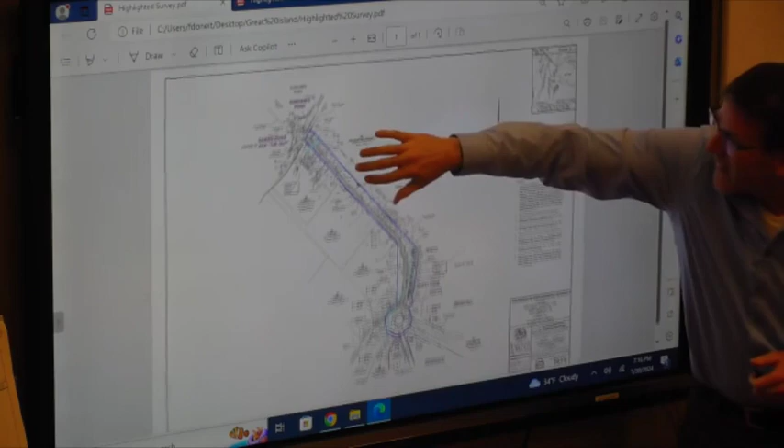The base flood elevation... Craig, can you just expand it just a little bit? Sure. Just open it up. Yeah, sure. Let me see if this is working. Otherwise, I'll go back to the mouse. Let me go back to the mouse. That was awful.

Let's see. Is there a little hand here somewhere? No little hand. If you click on the zoom in, yeah, just do that a little bit. Perfect, there. Yeah. So that's the flood zone by the gates. Okay.

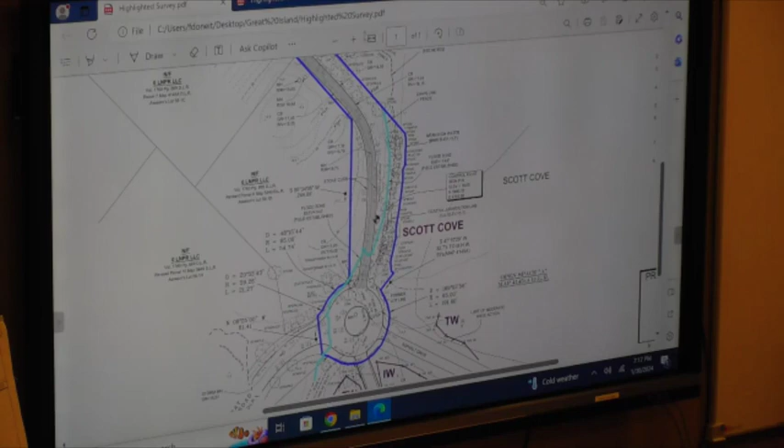This would be a flood elevation of 14. The grade here at the edge of the road is about a 10. Mean high water is an elevation which is indicated on the other side. We get down to the other side. So there's the same condition on the other side. Mean high water elevation is 3.7, so that's your kind of average high tide elevation. That represents the boundary of the parcel there. So this is the part below the base flood elevation over here. Thank you. Yep, going back big.

We have the coastal resources, a part of your coastal site plan, and we've submitted for the record a CAM assessment. So what are the coastal resources in the area? North side, we've got Gorham's Pond, estuarine embayment. It obviously is dammed off by the dam below Rings End Bridge, but it has tidal influence, so it's actually regulated. It's the one water body on here regulated both by EPC and P&Z. We have Darien River, AKA the Gut. That is a tidal water body, and there's tidal mudflats there and coastal resources there.

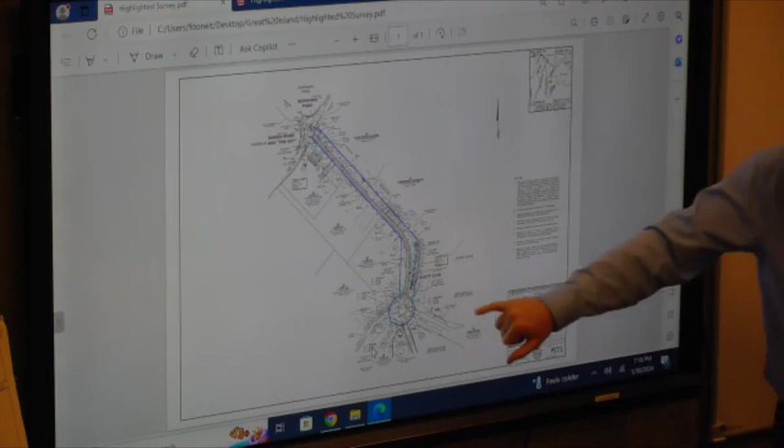We have Scott Cove, which borders the site here. This property boundary of this 1.6 acre property is coincident with that mean high water line elevation of 3.7. Again, a lot of tidal mudflat in here. It's a coastal resource. And then there were some flagged tidal wetlands. So at the bottom here, there's the two forking causeways that go into Great Island. There's the earth one that's lined by the sugar maples, and there's the stone one that's lined by the walls. So on the outsides of those causeways, there are tidal wetlands. On the inside of those causeways is an inland wetland because it no longer has any tidal influence.

So I'm going to go back to the tax map because you can see those two. Those are homeowner association parcels, I think. Yeah, and then there's two large open spaces associated with the original subdivision here and here, and those are the Great Island Association. Those are not owned by the town. And they both touch the cul-de-sac. That is correct.

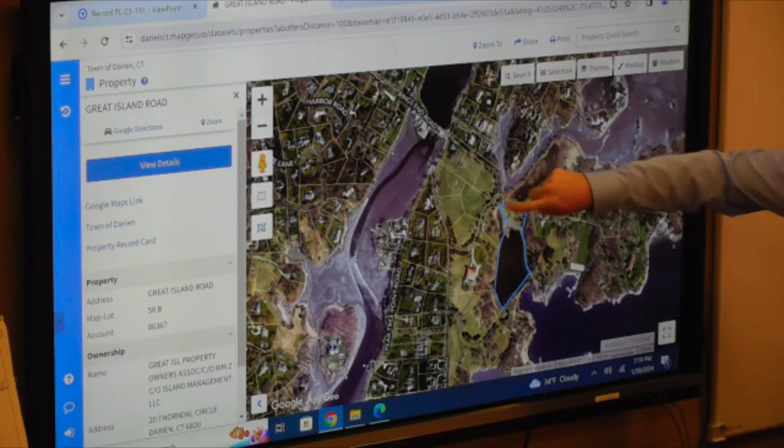So can you point the wetlands out there again? Well, yeah, you can pretty much see. This is all tidal marsh on this open space here. There's an inland wetland between the two driveways here, and you can see, this is a tidal pond here, and you can kind of see how the water from that tidal pond comes up in a finger right there on this actually residential property right there.

And then across the river to the north, what's the name of that street, I forget, where that house is? Oh, this is Beverly right here. Exactly, okay. Yep. So that's the tidal wetlands between our property and... Yeah, it's Scott Cove, where Scott Cove ends and begins is that, but that's what we call that. And that's all coastal resource tidally influenced. Thank you. So to talk about now the proposal, so we have the background set.

And I've got, this is the first page of the site civil engineering set. We've got a road profile at the top. We've got the plan view of the road at the bottom. Those two drawings are at different scales, so don't try to compare between the two of them. The bottom is a smaller scale and the top is a larger scale. But ultimately, there's a couple things that we have to do with this driveway. Let me call that up on here.

So there are actually portions of the existing driveway that extend onto the neighboring properties here and here. So that's property the town does not own. And so a part of this is getting the existing driveway off of the neighboring property. And then, in addition to that, we want to provide room for a 5-foot wide sidewalk and a grass strip between the sidewalk and the curb. So that west edge of the road is probably moving,

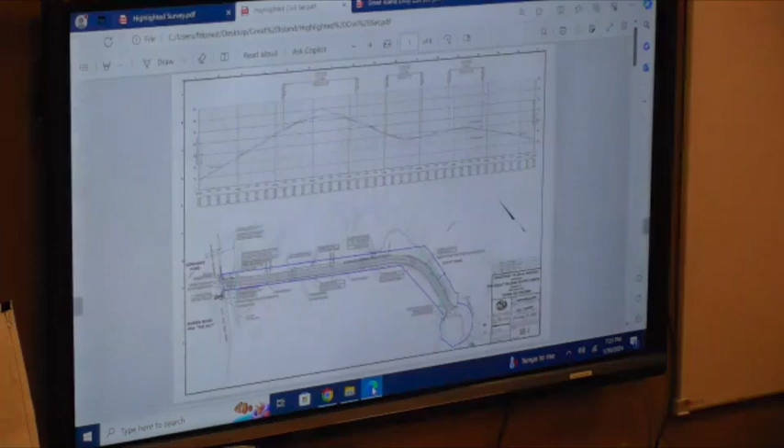So a few things have to happen to make this driveway and this sidewalk. One, we're kind of pushing things to the east a little bit. And in order not to disturb more property to that east side, we are proposing a few retaining walls, 3 to be exact, to make up the grade differences between where the new road is going to be and the existing grade along that eastern property boundary.

So the first wall that you see here is holding up earth on this side. So the high side is the neighbor side, the low side is the driveway side. You will see the face of that wall. And then these two walls are the opposite. The high side is the street side, the low side is the eastern boundary. So the wall face is viewable from the east. All you will see from the road side is potentially a parapet.

We have two ideas for protecting traffic and any vehicles that might decide to depart from the roadway surface. We're either going to go with a 2-foot parapet on these stone walls or install a wooden guide rail at those locations, again, for traffic protection. It's necessary given the grades and the heights involved.

In addition, of course, and Matt will talk to this in more detail, but this is too narrow to get to a 22-foot driveway here. So these gates have to be reconfigured. This pillar is on town property, but the town property boundary is basically just off the edge of that pillar. So these pillars and these gates here are not owned by the town, they are owned by the neighbor. So consequently, we're leaving them all alone and not touching them.

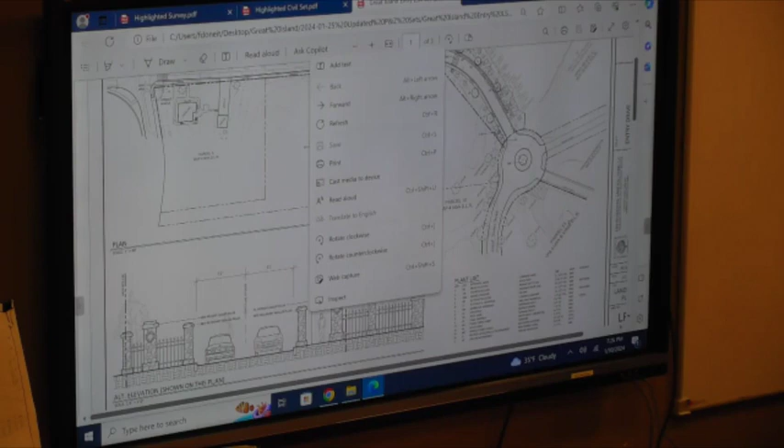So we're relocating this minor pillar to fit between the sidewalk and the curb here. And relocating this minor pillar to be symmetrical with that one. And then the major pillar, which is somewhere around here, is being relocated over to that side, again, to be symmetrical with this one. So this will be the new look when everything gets reconfigured.

So that was the gates, that was the road, that was the walls, that was the sidewalk. I guess I could talk a little bit about... Do you have elevations of the three walls? No, we don't have a profile view of the three walls. We have a grading plan, between the road profile and the grades, right? We have plenty of grades on here. We do have top of wall and bottom of wall elevations indicated. And one of Tighe & Bond's comments was to add the top parapet elevations, which we've done in these notes right here.

Greg, before you go too much further, when you use the term gates, you don't actually mean an operable gate? Correct, thank you for clarifying. So it's largely, most of it is just fencing, right? Yes. Okay. And there are existing gates when you look at it. I've never seen them closed, so who knows if they even move, but we're not proposing to add gates.

The town cannot provide a gated control here, because very specifically, parcels 6, 7, and 8, which are neighboring properties, all have access rights to this strip of land. This is not a street right-of-way. It is just a piece of property owned by the town that can function as a driveway. But these three properties have rights to here, so we can't close this off. If there was ever a need to restrict access to Great Island, that would be done down somewhere there.

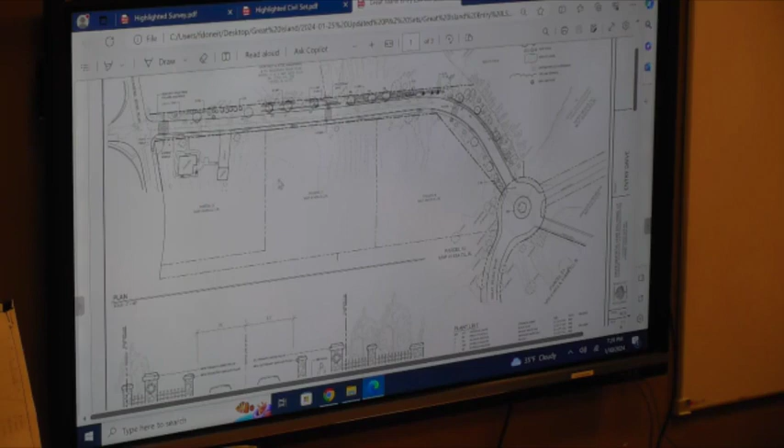Over here. Okay. So we do have a suggestion of reusing the gate pieces, but putting them to the back of the pillar, more as an aesthetic feature and to accentuate that secret garden feel as you're driving through it. But they would not be movable. It's worth pointing out, now talking about those neighboring properties, that we are making provision for driveway entrances should those properties ever be developed. So we're dropping the curb and the sidewalk at a couple of locations to allow for that access to be created in the future.

Have those points been decided yet fully? I mean, we don't even have houses decided on this. So we're coordinating with that property owner on the location of those driveways, and we've taken direction from them as to where they might want them. I agree with your assessment. Whether we do it now or later is on the table, but for now we wanted to share that we might have two curb cuts there for future use, and we're coordinating with the neighbor. So just one curb cut for each of those two lots?

That is correct. Even though the one lot is a flag lot that touches Rings End Road? Yes. So the legal frontage for parcel 7 is on Pear Tree Point Road, and the legal frontage of parcel 8 is technically on Great Island Road. But they have rights to use this property. That's fine. I remember that came up last, and that's why we moved the cul-de-sac way back when. At what point will the old road be removed? Well, that depends on when we get our approvals and a contractor on board, but we're trying to do the work in May, June, July.

I'm just thinking about access during construction, that was my thing. Because we're moving this roadway over, we're intending to leave the driveway in place and build all the stuff on the east side first. Once the east side is done, we can have traffic on that and start working on the west side. So within reason, there will always be the ability to traffic on that driveway. It's the same way they do I-95. Exactly. You do the left side going south, and then the right side. Unless you could do it all in one weekend, we'll close the road down for you.

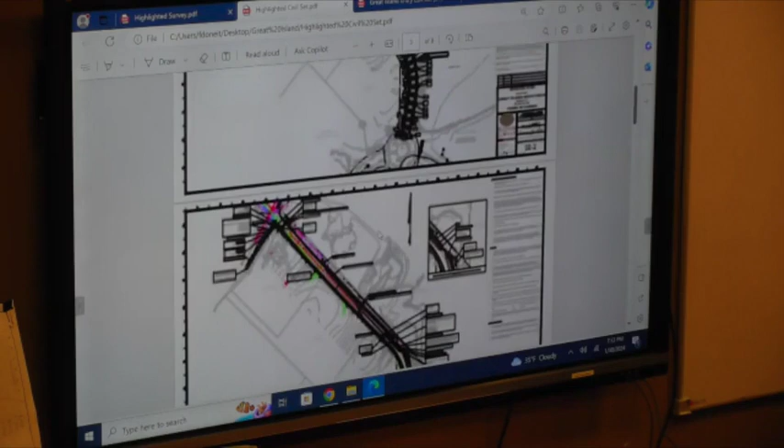Those are located, again, here you see 2 new catch basins at the front, an infiltration system in the edge of the right-of-way here, and then an overflow into the existing system. Similarly, new catch basins in the hollow here, an infiltration system to treat the water there, and an attempt to reuse an existing outfall there. If we have trouble reusing that existing outfall, we have an alternate plan just to put a level spreader on our property for that overflow. And then we have an existing catch basin over here, but a new infiltration system there, tying in again to existing stormwater controls here.

So the rain running off paved surface, the first flush of rain, is caught in that infiltration system. We've done soil testing out there. We know groundwater is low enough and ledge is low enough, and we know the perc rate is high enough to accept the water and treat the water quality volume before discharge into coastal resources.

We did get a number of comments from Tighe and Bond. We have responded to those comments. I'm not going to go over all of them, but I will go over the few that resulted in updates to the plans that we submitted earlier today. Parapet elevations were clarified. I mentioned that already. We modified the elevations of area drain 1 and catch basin 3.

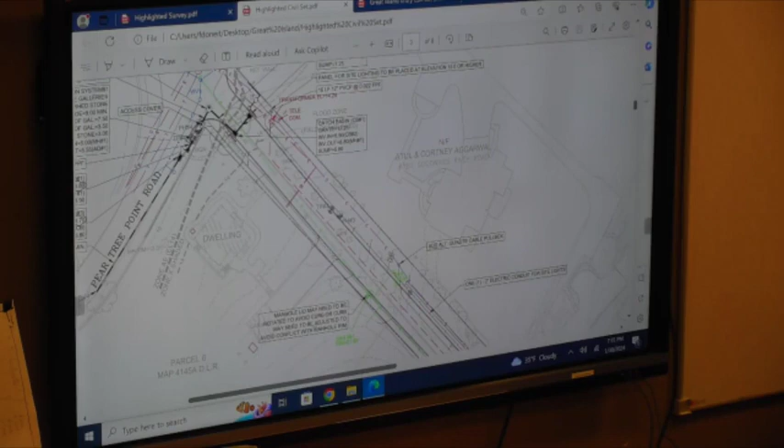Joe Canas, the peer reviewer, asked for a double row of silt fence, which is on the erosion control plan, on the edge of the road where it's near to Scott Cove. He asked for a construction entrance to be indicated, those riprap pads to prevent tracking on area roads. And he did have a good catch. We specified a 6-inch tall catch basin top, but we only have 4-inch tall curbs, so we updated the drawings to specify a 4-inch tall catch basin top.

So those are his comments that ended up revising the plans, but overall he agreed that this is not going to change flood elevations or flood action in any way, and therefore is compliant with Section 820 of your regulations.

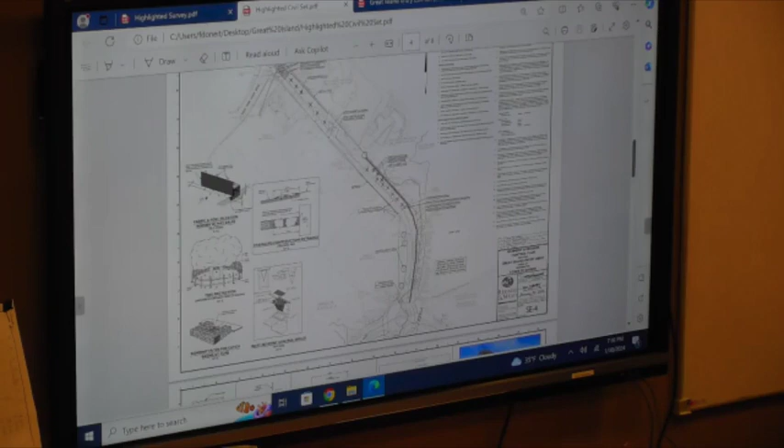So in terms of cut and fills, since we're also here for a land filling and regrading application, we have, let's see, where is it? We have the walls, which we've talked about. We have a net import of 50 cubic yards of fill. This is pretty low because basically we're matching existing grades. We talked about where we have to cut a little by this wall.

No walls are really taller than 4.5 feet. That's the highest retained elevation. And then similarly, we have a little fill against this wall, a little fill against this wall. Again, no more than 4.5 feet will be the height of those walls.

The walls, again, we reviewed the design of the walls with ARB and showed them options of walls that were around the island, but basically it's going to be an orthogonally cut New England granite with an expressed beaded joint, which matches basically most of the stonework on the island. Not all of the stonework on the island, but most of the stonework on the island follows that same orthogonally cut pattern, both in architecture and in form.

When you get over to the east side of the island, which is the old Mediterranean style mansion, it's more of a just kind of angular situation. It's not really orthogonal, but certainly the walls that edge the roads tend to be orthogonally cut. So they've preferred the version with no cap, and that's what's indicated on the detail now.

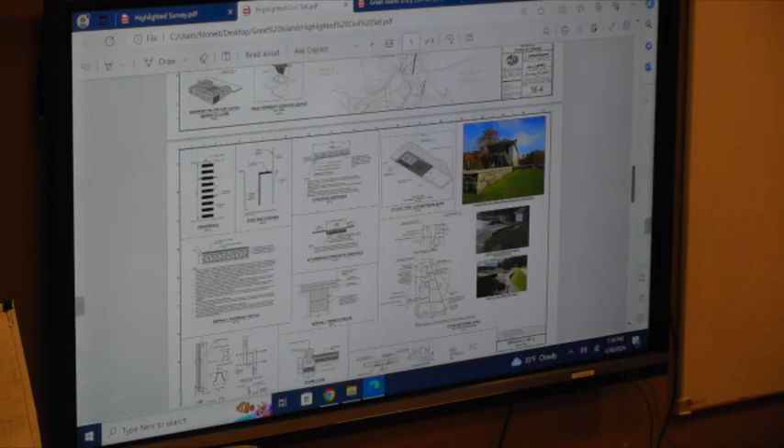Right, so if you're looking at the document you put in, I counted you had three reports. The zoning application narrative, we went through that whole thing, right? Mm-hmm. The last piece was cut and fill. Yep. The first thing you did was the coastal area management, went through all that, right? Yep. That's the first thing we talked about. Well, so I can touch base on that just quickly.

So I've identified the coastal resources, which I showed you. We went through the coastal policies that are set out by the Coastal Area Management Act, and basically there are no impacts to any of those coastal policies. And that's the summary of the report. That's provided for your record.

Also provided in your record is a traffic report from Hardesty and Hanover, which found basically that area intersections will continue to operate at existing levels of service. We are proposing a new stop sign and stop bar at the end of the road here, and there will be some directional signage added, again, to the island. There'll be a stop bar and stop sign here.

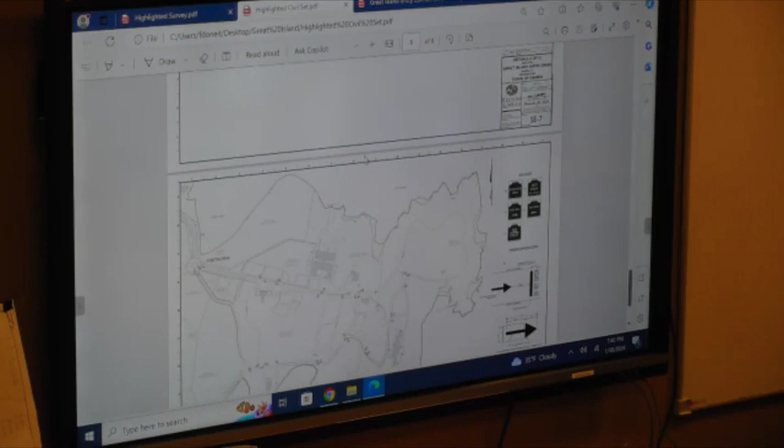Again, in the near term, the idea is to establish a one-way loop on the island, so you would go in the walled causeway and you would come out the earth causeway. Again, that's just set up so we don't have to do any disturbance on the island at this point, and we can wait for that master plan process to take shape before deciding how to alter the infrastructure on the island. Those would be kind of custom signage to fit a park-like scale.

Talked about drainage, talked about coastal. There were some comments from the fire marshal that we responded to. That's just a DEEP letter that says, yeah, basically... Should you do your letter? It was pretty much a no comment. Right, exactly. Yeah, so this is from the Department of Land and Water Resources with the Department of Energy and Environmental Protection. It's their review of the application, and basically they didn't find that there would be any impact on coastal resources. And that matches up with this, right? Yeah, matches up with that.

So Bob, the fire marshal, wanted to make sure that he would still be able to have emergency access over Great Island Road. That is within the town's rights to have emergency access to the island from Great Island Road should it become necessary. He asked about whether or not we want to use parcel 23A to loop water mains. We don't have to, because there's already a water main coming in from Great Island Road into the island here, and a water main on Ziggy's Way coming into the island there. So if we needed to create a loop, we could do so on the island.

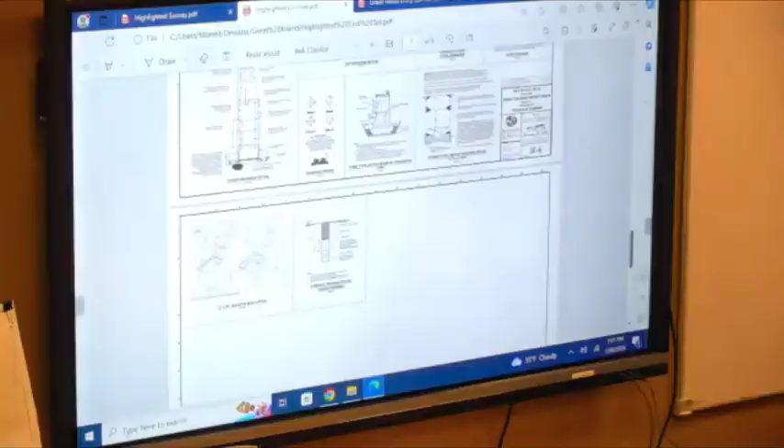And then it's important to note for the record that the town will not allow parking on this new driveway, as you might imagine, but we might have a couple of signs to that effect to make sure everybody else understands that. I think maybe I'll have Matt come up, run through the landscape and lighting plans, and then we'll get to your questions. Can I just ask? Yeah. Before you step down, can you just point out the crosswalk also? That's new? Oh, sure, yeah.

So as I mentioned, the sidewalk coming down Rings End Road is on the west side, and it stays on the west side as it goes over the bridge. But right now, the sidewalk ends right here. You can see those two gray lines. That's the end of the existing sidewalk. So we're picking up there.

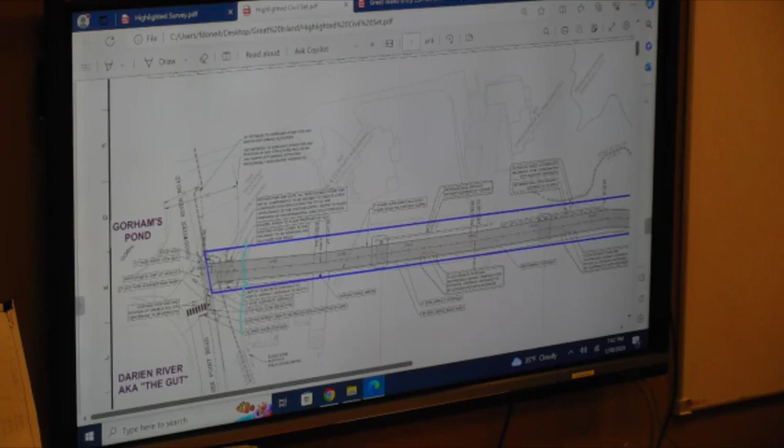We're putting in a crosswalk to get across the road to the island, an accessible ramp here, and we're bringing the sidewalk up and around. This portion in the right-of-way and before the gates will be concrete. The portion after the gates, past the piers, will be asphalt. And we're pulling the stop bar and stop sign back to accommodate the new sidewalk.

Can you just show us that again in the Google Maps Street View that you have? Sure, yeah, that's a good idea. So, there you go. Basically, there's the existing sidewalk. We'll have a crosswalk coming right across, basically where that seam is, to here. The stop bar will get pulled back a little bit, and the stop sign gets pulled back a bit as well. And then this new sidewalk will pick up here and go up and into

the property. Do we need local traffic authority permission to put that stripe in the road, or is the local traffic authority sitting right there? I think Ed has started coordinating with Don Anderson, so he's aware of this project, and they'll just coordinate the details. There's really no changes to the road. You have an existing stop sign, you're just moving it a few feet, moving the stop bar a few feet, so that is not going to be an issue here.

So that's your staff that does that, I'm sorry, Ed, right? It's your staff that does that. Yes. Any change to the position of a traffic sign or traffic striping, they have to bless. The local traffic authority blesses it, and then Public Works puts it in. Yes, that's correct. Got it. Any striping in the cul-de-sac, the turnaround? No.

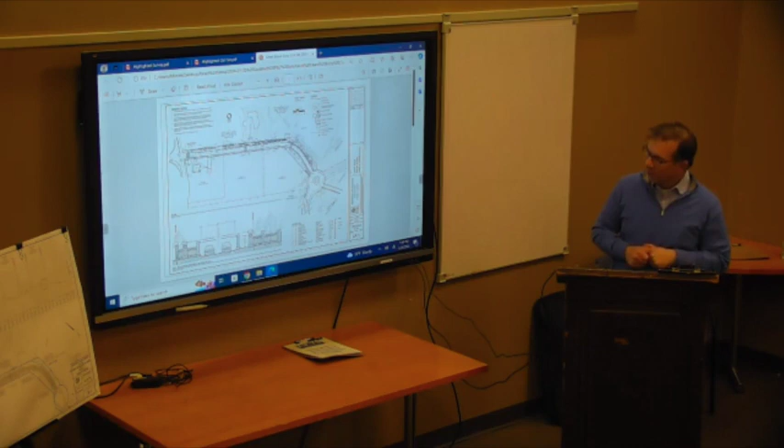Welcome, Matt, just state your name. Good evening, Matthew Popp, Landscape Architect, Environmental Land Solutions, Professional Wetland Scientist also. I prepared the landscaping plan that you see right here. Maybe start at the bottom here, the section with the pillars. Here's the primary pillar, which is about 8 feet, maybe 8.5 feet. There's some secondary pillars right here, which are maybe about 6.5 feet in height, not as wide.

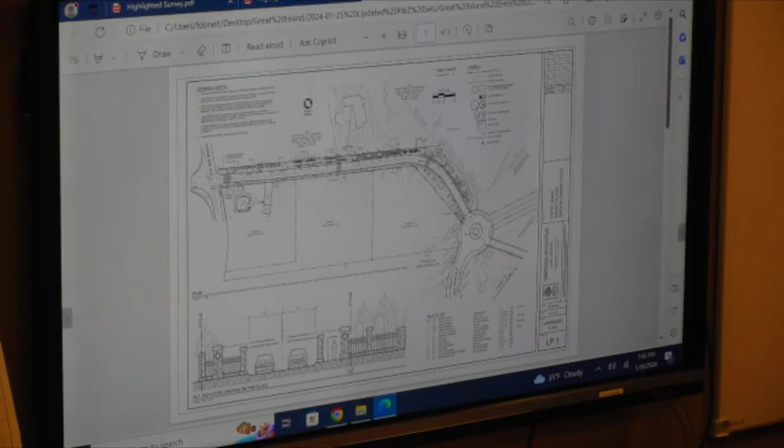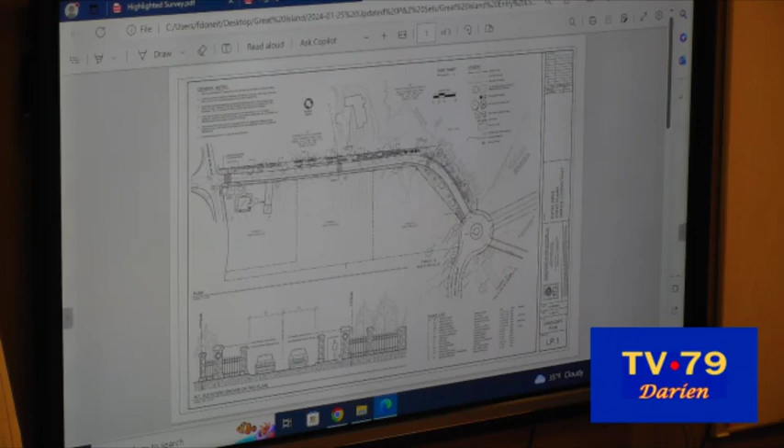So the property line is right here. This is the existing pillar right here, which we're not going to touch. The existing sidewalk kind of wraps around through here. That gets abandoned, and the new sidewalk gets placed just to the left of this existing pillar that's going to be maintained. The smaller pillars that were over here get relocated. There's one here, another one over here, so they kind of frame the entryway. And then the existing larger pillar, which was right here, gets pushed over to here.

The vegetation on the pillars comes off, so we can see them. We're thinking there'll probably be, on the larger pillar, some type of plaque, so we won't have a freestanding sign out here in front. Zoom in.

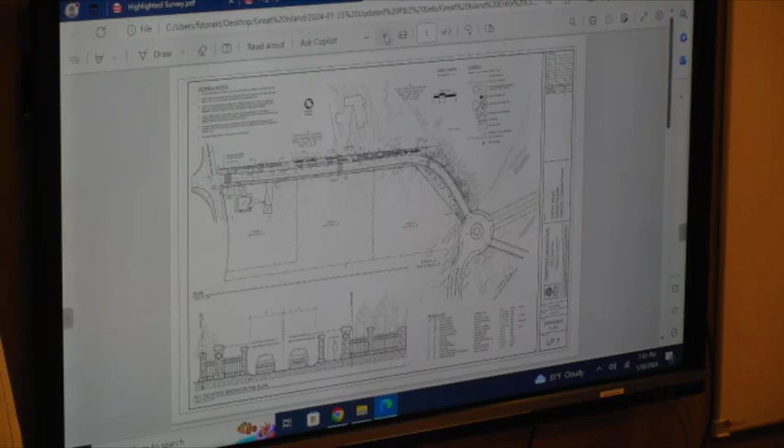So at the entrance, the larger pillars are on the outside, the smaller pillars are inside, and the sidewalk goes between the larger pillar and the smaller pillar. We'll have some type of pavers right here that line up with the pillars. The existing gates get placed on the,

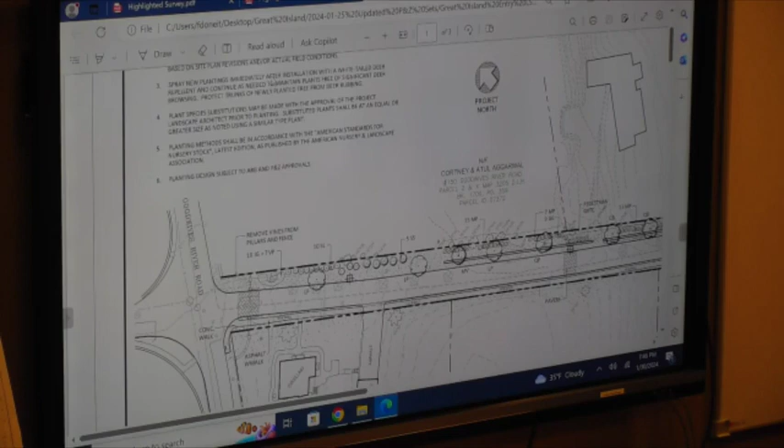the existing gates will get placed on the back side of the smaller pillars here. They'll be fixed. Right now I think they're fixed; I don't think they actually move. And you can see the pavers here lined up with the edge of the gate and with the edge of the sidewalk going across.

So is that similar to the pavers that you have inside Darien Commons now? Did you do that plan, with the pavers between the two apartment buildings? We haven't decided yet, but we just want it to be somewhat smooth so a person biking over it doesn't fall. I'm concerned about plowing and paving.

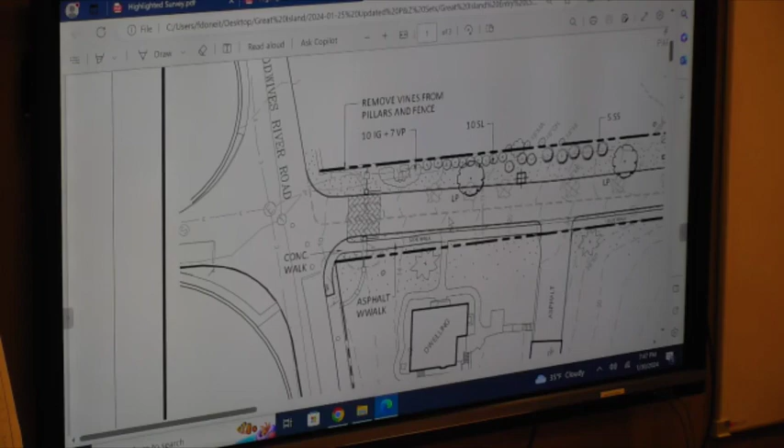There's such beautiful cobblestones that line the existing driveway that really make it very aesthetically pleasing and special. Can't we reuse those cobblestones instead of those pavers? We're not proposing to use the cobblestones within the surface of the driveway. We are going to salvage them, and we are looking into ways to reuse them. You see cobblestone aprons all the time. Why wouldn't we consider that in this application? It seems so appropriate. I think you see Belgian block aprons frequently.

Cobblestones as well, but if you're biking, I don't think that's safe to be on. There were some people concerned about the oak trees, the acorns falling on the pavement and running over those while biking. When you're not walking on the cobblestones, you're walking down the asphalt. But they'll be flush with the road, right? You presumably have a sidewalk there, which would not have cobblestones on it. That's correct, the sidewalk, yes. This is just for the, anybody who's been to Nantucket, when you drive over those cobblestones, you slow down.

And in Manhattan too. I bet you a nickel that you don't have enough cobblestones to do all the humps. I bet you they line both sides of that driveway all the way down. You have more than enough. All I can say is that the application as presented is not proposing to use the cobblestones in the driveway. Understood. Okay. But we talked about it, yes.

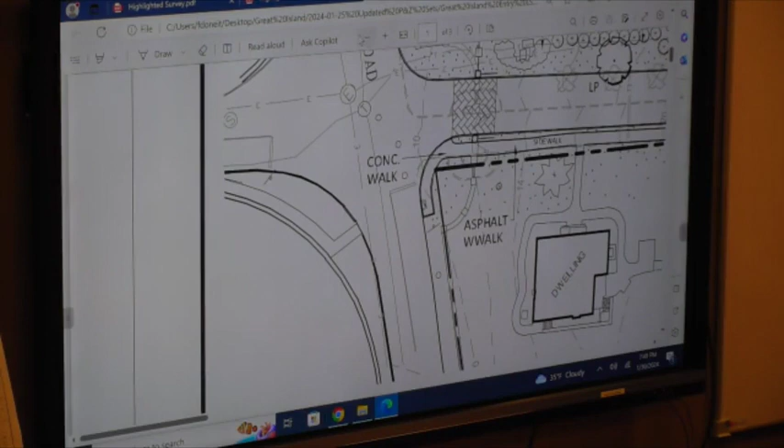But that's not gonna be a hump though, that's gonna be level with the whole road. Flush, yeah. It's a visual cue, but not a physical cue. Right. So when they're plowing it, they're not gonna rip them up like my snowplow did on my driveway last week. That's correct. There you go. You hear his concern.

All right, Craig, where's your erosion control plan? There we go. There's 16 trees that are coming out. They're mainly all Norway spruce. There's two groupings of them: a tight grouping right here, and then a looser grouping up through here. You can see some from back through here. So those are to be removed. Again, there's 16 of them.

We're proposing 12 shade trees, mainly oaks, swamp white oaks, tupelo, there's a magnolia. The ARB wanted to have a large growing tree, so they want a London plane tree. Originally we didn't have those, so we added 6 of those. The original plan actually had more shade trees than the plan before you, but they wanted it to be more open feeling, so some of those trees were removed.

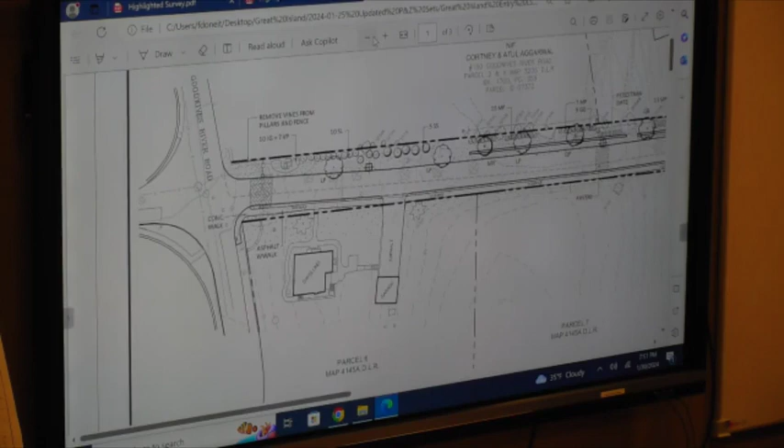In addition, we're planting actually 18 evergreen trees, 5 hollies and the rest spruce. Let me get to my plan. All of the plantings are up on the top on this side of the road. This house over here has views to the coastal waters, so the plantings over here are somewhat lower because we don't want to block the views. The evergreens start mainly in this area right here.

This homeowner here was concerned about headlights from cars leaving here hitting her house. Sorry, there's something wrong. Please try again. Didn't like your answer. He doesn't like the headlights. That's AI.

She did say every once in a while there's a police car patrolling at night, and at 2 o'clock in the morning there's a light that hits her house, so that's why those are here. But they also wanted to keep views open, of course, to the meadow across the street.

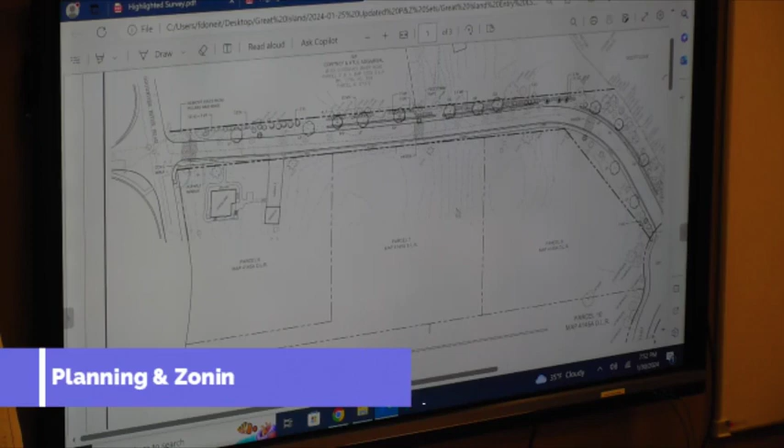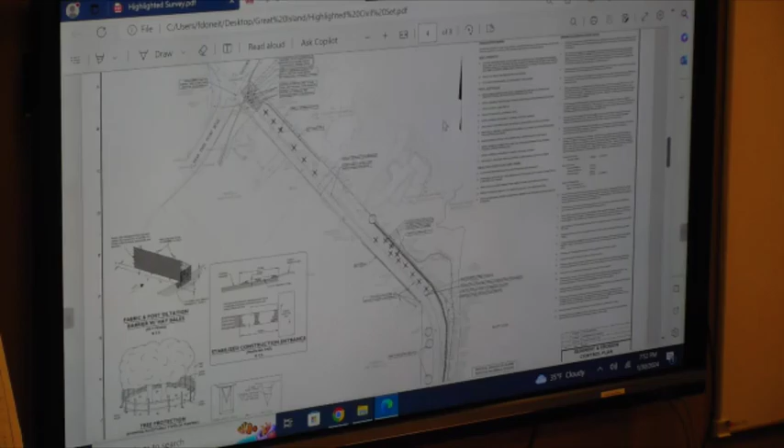We are proposing three, I wouldn't call them humps, but paver bands. I get the one at the entrance. Four now. Four, that's right, those have been updated. Where's the fourth? If you look at the paper over here, there's one at the entrance, and then there's one, two, three. Sorry, I was still looking up there. I can go all the way up to the top.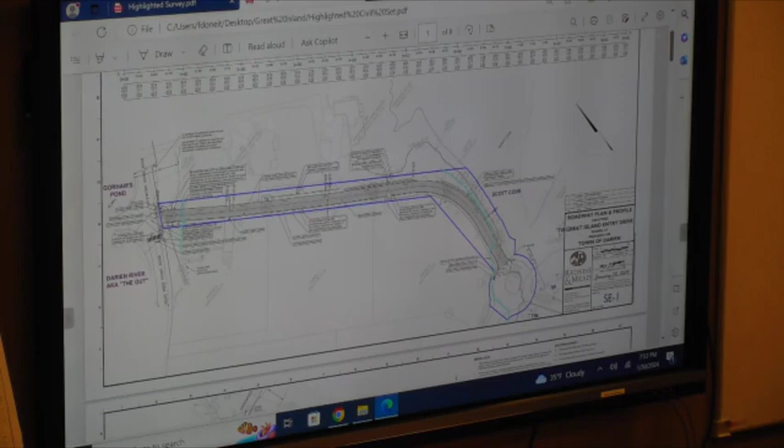So they had shifted. This one's still in the same spot, but we're adding two here. Originally we had one at the high point of the road, the crest. We got comments from the neighbors that if it's at the high point, you can't really see it as well. So we pushed them to here and here. They also lined up with the property lines. It's a great idea. Thanks to the neighbor.

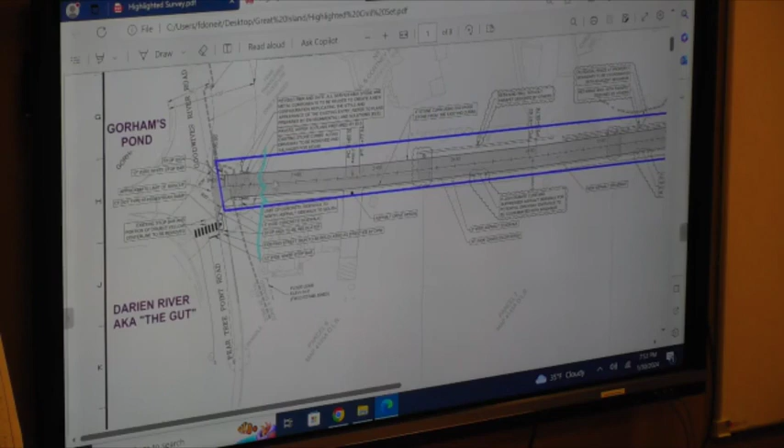So we're also proposing a few light poles. They're probably like 8 feet in height, residential scale. They are also going to be where the paver bands are located. What, do we need lanterns?

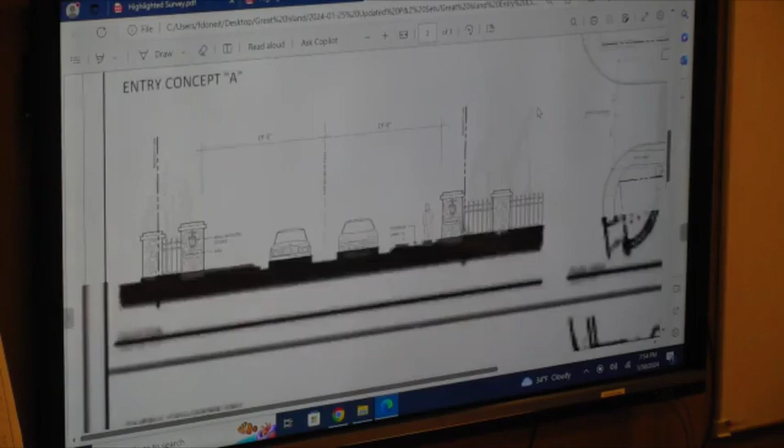We're thinking one over here, kind of at the curve. We originally had one at the high point, but then we had the 2 extra ones. There's 4, or 5, rather. Well, the 2 uplights here, no lamp. 1 lamp here, 2 lamps there, 3rd one here, and the 4th one at the end. And the idea is simply not to light up the road, but to provide a visual cue for drivers so they could sense where the road is going, just enough light to do that.

So because you put in another quote-unquote paver, did you add another light post? No, we just moved the same amount around. Okay. And you couldn't accomplish that with a lower light, like a bollard? Well, your regs allow up to 15 feet in height, we're going with something around 8. So it's got to be enough to throw a splash of light on that 22-foot width. So if you start to go down, you've got to point it kind of sideways. So we're still trying to cast the light down.

Which begs the question, I know we're not supposed to talk about the uses, but if you drive through Waveny, there's no lights throughout their parks. I'm curious why we feel we need them. I don't think there's a preponderance of lights, but there are select locations. I drove it the other day, there's no lights in their drives except around the parking. We think it's a good idea for safety. I think that's all we can say. I think Waveny actually added lights and cameras at the entrance, but not through the rest of the drive.

Okay. But let's look at the cutaway of the lights first. So this is an existing light fixture on the site, so we're going to try to match something similar to that. I think there's only maybe one of these on the site, but that was kind of what the ARB liked. There's all different fixtures at this scale, so that was the intent we were heading towards. You didn't spec it out yet? I have to find something that's LED, downward pointing, but at that scale. That was the guidance ARB gave us, find inspiration in that light. Okay.

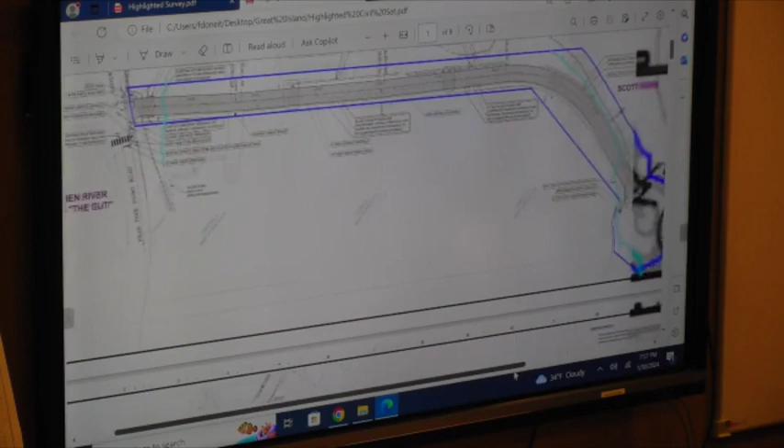And so if you can just go back to that landscape plan and give us pretty much where we are right now. Well, yeah, that plan is good. So 1, 2, 3, and then 4. Also on the pillar, we were going to have 2 small uplights just to light the pillar. So, I think that was it.

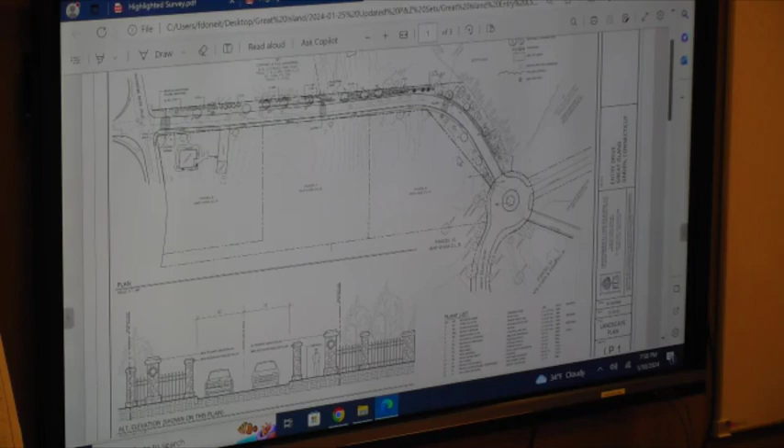There's a utility box kind of over here, right back here. I'm going to try to screen that out. We have a number of shrubs, inkberry, bayberry. There's some evergreen viburnums and the cherry laurel. The existing woods are basically back through here. And they're shown on SE1, the site plan. The new one that came today? Yes, correct.

So, that one's up there. Yeah, that's it. So any more questions from the board, or whenever you're ready, you go to the public? Okay, well, hold on one second. With regard to this thick traffic report, he's not here, right? That's correct. Okay, so I know you touched on it a little, you just want to walk us through it a little bit? You can kind of read it, you're a good engineer.

Well, it looks like he started from way back out, too. They did a very thorough job with this initial traffic report. They studied the intersections up at Rings End Road and the Post Road, and they studied the intersection down at Rings End and the site driveway. And they studied the intersection over at the end of Goodwives River Road where it hits Old Kings Highway South.

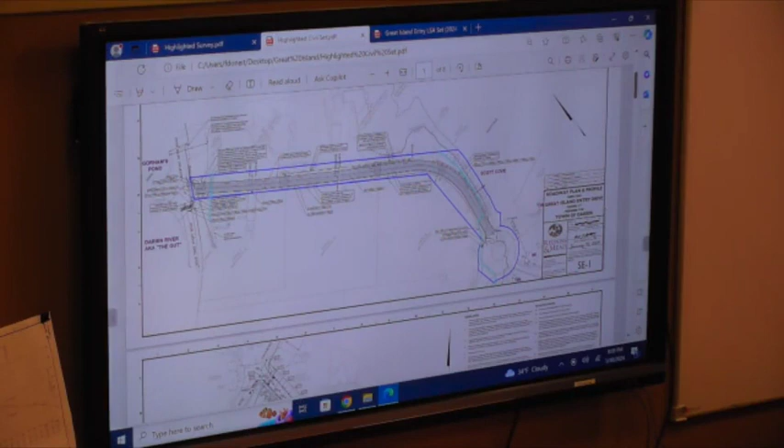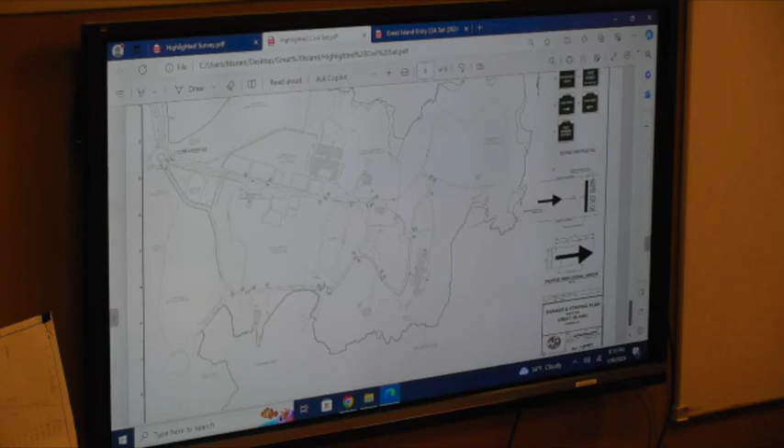Yeah, so once you get to the cul-de-sac, there's two ways onto the island. Those driveways are also 16 to 18 foot wide in general, and so not suitable to support two-way flow. So the idea is, in the near term, until bigger decisions are made, to establish a one-way loop using the existing driveways on the island. You would go in along the stone causeway, the walls, loop in this direction, and go out on the tree-lined causeway on the north side. Oh, I see. And there'd be some signage and striping to provide those cues. Thank you.

Okay. In the cul-de-sac that's there, is there a feature in the middle of it that you drive around? I haven't been out there. There is, yeah, there's an island. So you go around that thing, okay. And then the Great Island Road, which is to the left, is being closed. That's correct. That's privately owned, and there will not be general public access on Great Island Road. It'll only be used for emergency services and for utility runs. And as part of this application, we're not doing anything permanent to shut that down? The town is not. Okay.

And then the bottom leg of the cul-de-sac, that's where you're going into the island? Yep, you come out here, in there, out here, up there. So the cars actually never cross each other? That's correct. Everyone that's coming in stays to the right. Yep, exactly. Are we gonna move the mailboxes in the cul-de-sac as part of this? Right now, you still have the need to get mail to folks. That's on town property, correct.

So eventually, I assume there'll be something temporary, like the white fence that's there now that blocks Great Island Road, that obstructs public entrance. Probably sooner than later. Those mailboxes are for the people living on the island, as long as you have leases. The mail truck would stop here and wouldn't go onto the island and deliver mail. Okay. Didn't we just create a couple of driveway entrances on Great Island Road too?

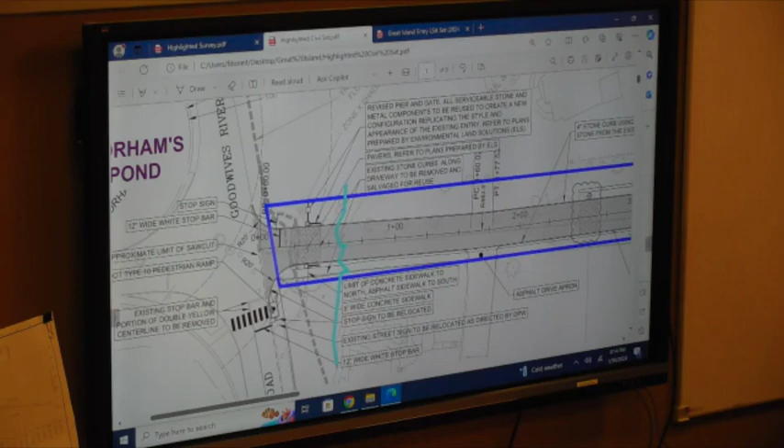All right. There was something else in my head. We got the traffic report, we got all of you. Are we missing anybody else to represent this? I think Mrs. McNally is here. Would you like to speak to this application since you're the chairman of the Great Island Commission? Sure. Please, welcome.

Hi, everyone. I'm Monica McNally. I'm a little bit late tonight because I'm on the Board of Selectmen and we are in budget talks. I'm also chair of the Great Island Committee, and I just want to thank you for taking the time to review this. This has been a project that's been ongoing since we first started considering this property about 2 years ago. And the application in front of you today is to widen the road to provide safer access to our residents, especially pedestrians right now.

It has full support of the Great Island Advisory Committee. We have some members here tonight. Thank you for joining us and for all of your hard work on that. And thank you for your consideration. Fantastic. Does anybody else from the committee want to speak now? I think we're good. Okay. Great. Anything we're missing? I want to open up to the public.

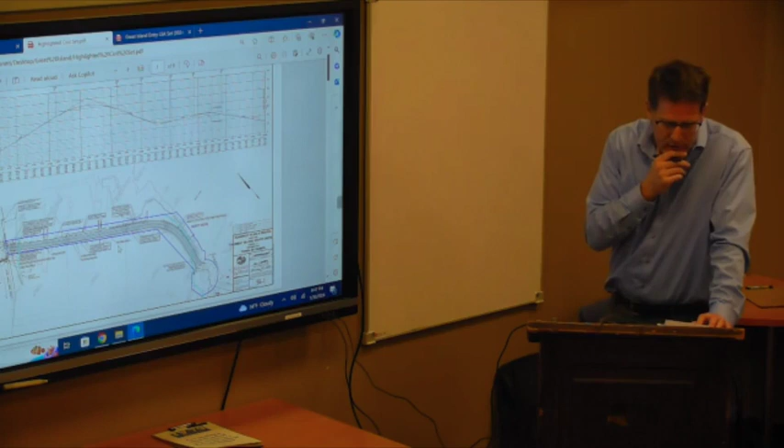And again, the addition of sidewalks to the cul-de-sac, we think is a future phase. The whole cul-de-sac is town property and there are viewpoints around it. But at this point, how that might look in the future is undecided. And we had two engineers look at whether or not additional catch basins were needed in the front half of the road, halfway up the hill, and both, meaning Ed and I, feel the two at the bottom of the road is satisfactory. And Joe Canis, it would be a third. You're right, it would be a third. Yeah. It was not one of Joe Canis's comments.

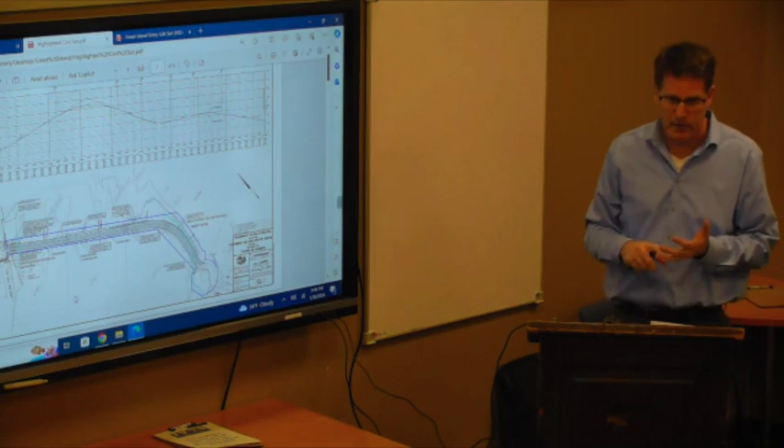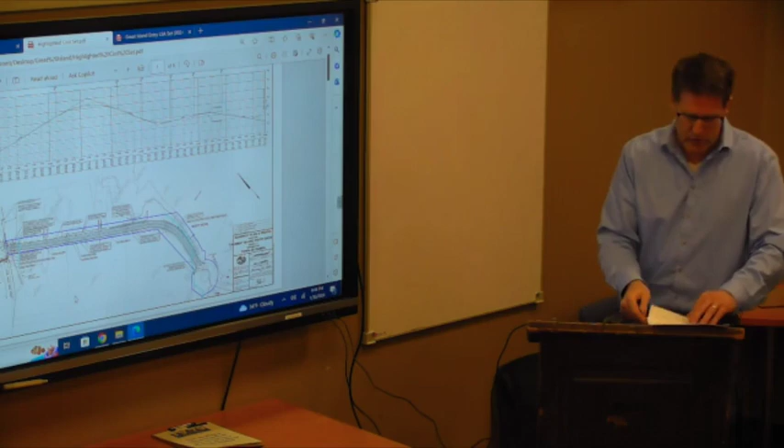On big picture, the applicant is here tonight proposing a new 22-foot driveway and a 5-foot sidewalk. That's the basic objective of the applicant. So looking at sections of your code that are relevant: coastal area management, section 810, flood damage prevention, section 820, landfilling, excavation, and earth removal, section 850, S&E control, section 870, stormwater management, section 880, and your site plan sections. You have to decide whether or not that application meets your regulations. I believe we submitted the data reports and analysis that would typically lead to a conclusion that it is consistent with your regulations.

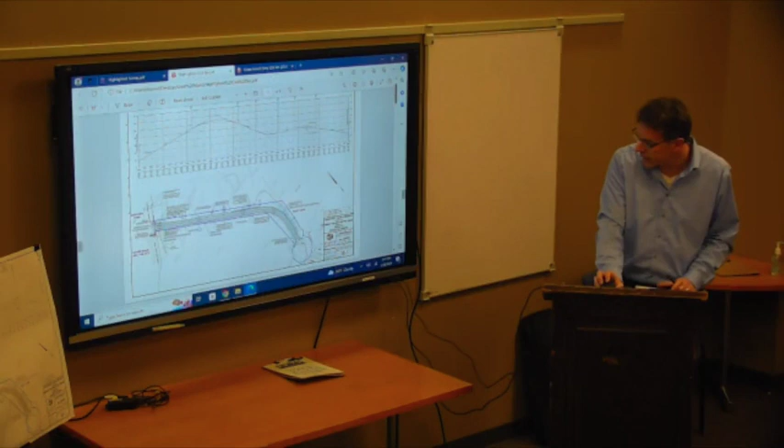As far as a couple of easements mentioned in Joe's letter, the first one was, again, a little bit of grading we have to do on the west edge of the road, and that is to pull the existing driveway off the neighboring property. And then obviously we've got to put topsoil and seed back in that location. We've been coordinating with our neighbor and sharing plans, and they're very well aware of the work that needs to be done. So that easement's taken care of? I don't know that there needs to be an easement. There might be an appropriate exchange of certificate of insurance and a right to enter to do that narrow work, but we'll coordinate with our neighbor to make sure everybody's satisfied. So that's conditional approval. Okay.

The other one is the clay pipe. I would say the clay pipe's been there for as long as the driveway has been there, and so therefore there's an easement of use for the water discharging from that clay pipe. If for whatever reason, whether it's the condition of it or there's a property issue, we can't reuse it, we've indicated an alternative where we don't have to. So the application works either way, is my point. So you could abandon that pipe if you need to? If we needed to. We prefer to use it because it's there and it's been there for 100 years.

But can you just point it out again? Yeah, it's shown best probably on the utility plan, right there. And it goes out to the wetlands? Yeah, this is the edge of Scott Cove here. Okay.

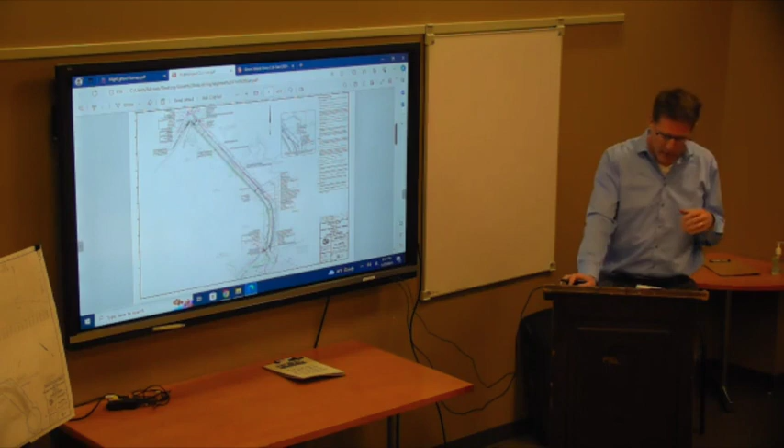Okay. That's right. I can talk more to Rings End Bridge, but Rings End Bridge is suitable to take any traffic loading that any road in town takes. The town maintains the bridge. The town recently rebuilt the bridge 8 years ago, a little longer than that. But it's rated to take the same amount of traffic as any road or bridge in town.

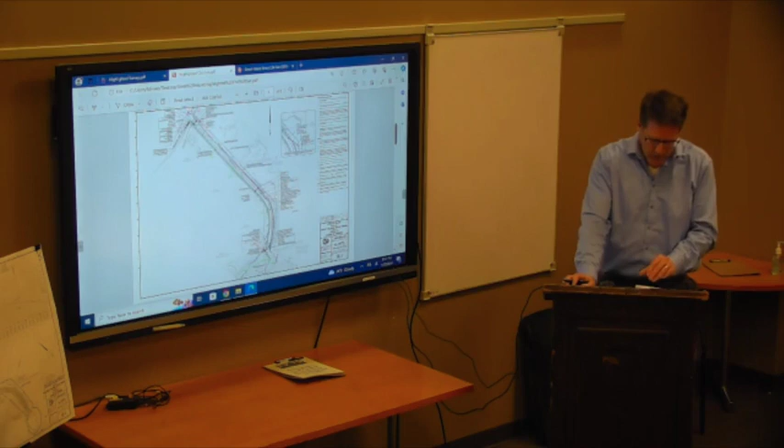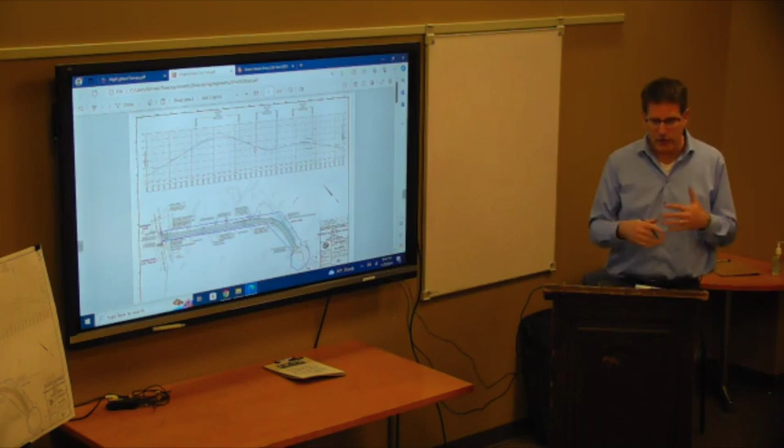So in terms of the material of the sidewalks, this property is a little unique in that there are some moderate slopes, the 8% slope up and the 8% slope down. So using a loose material, that material is going to migrate, and it's not going to maintain a stable, safe surface that is usable to the point where the Director of Public Works is not worried about liability. So you're talking about crushed stone, right?

Yeah. So we looked at the Waveny detail when we did Highland Farm. Right. And so we put in 50 or 100 feet of that detail, compacted it down, and we tried it with a wheelchair, and it did not work. And that's why we chose not to do it at Highland Farm. That's why we're choosing not to do it here. Here it's exacerbated by the steep slope, which would mean that I wouldn't recommend it.

Have you considered oil and stone? For the aesthetic? Well, once you put the tar in there with the oil and stone, it's effectively impervious, and it's not as smooth. It's harder to maintain. But just for the questions about the aesthetic. Yeah, again, in our opinion, asphalt is ubiquitous in residential zones all over town. It's that choice of surface.

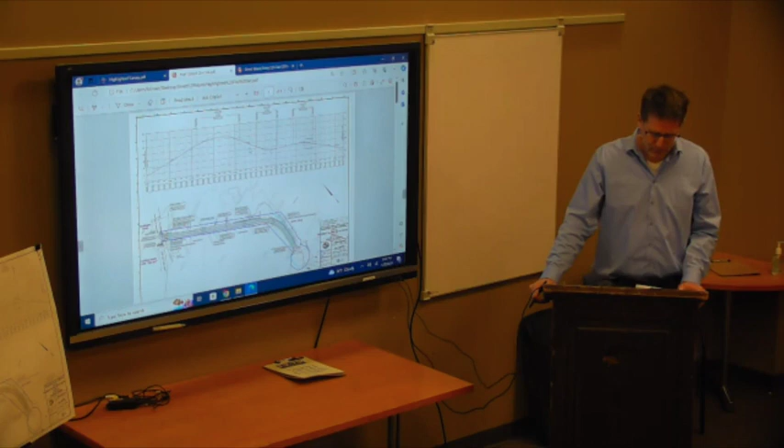So if for argument's sake you did do it, it's not called item 4, it's crushed stone, that's like the path. It's like a chip stone, a combination of stone dust and chip stone compacted down. So that's what's at the high school running path, right? Probably, yes, something pretty similar. And when that washes out, it disappears and they gotta rebuild it. That's right. And we have the same condition there where it's steep slopes. That's correct. So that's why you picked the asphalt, got it.

Craig? Yes, sir. You mentioned we looked at pervious asphalt too. Yeah, so in terms of just on the drainage side, porous asphalt or permeable pavers, those pavements aren't recommended for steeper slopes because they have less tensile strength than conventional asphalts, and so they tend to pull apart over time when you try to put them on slopes over 5%. Okay.

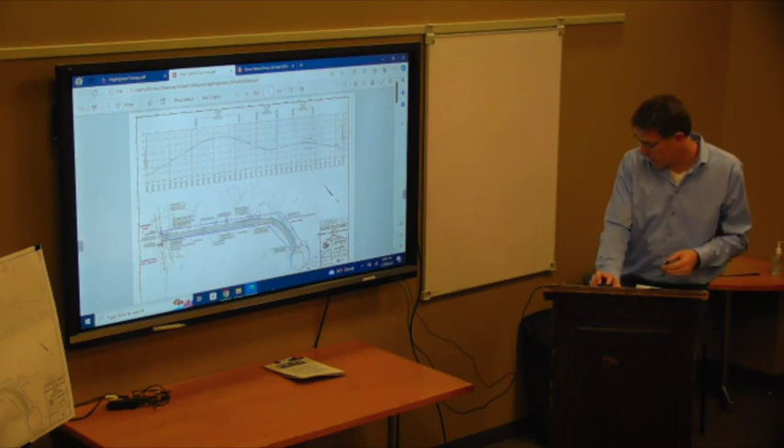There were a couple of questions, just big picture. Is the sidewalk designed for ADA wheelchairs? So in the sense that it's on the edge of a road, and we're paralleling the road, yes. It's not less than 5%, which would be fully accessible, because of the steepness of the road. But you don't have to put ramps in on the edge of the road when you're putting sidewalks in. So otherwise, we have a ramp at the beginning, a ramp at the end, we have a hard, stable surface. Nuanced answer, given its location.

So the town does not own Ziggy's Way. It is a private road. Mr. Raymond can talk to it. I don't think it's for sale. And Great Island Road, the town does not own, and it is a private road. The only way in to the island is Parcel 23A. That is the only property owned fee simple by the town of Darien. And it took a year and a half to get to this application because we were negotiating the purchase of that cul-de-sac to make sure that access was unfettered.

Want to talk about lighting one more time? Yeah, again, look, we went super minimalist on this thing. This is not about achieving a consistent level of light all along it. We still think it is a good idea, given the length and narrowness of the driveway, to provide these visual cues.

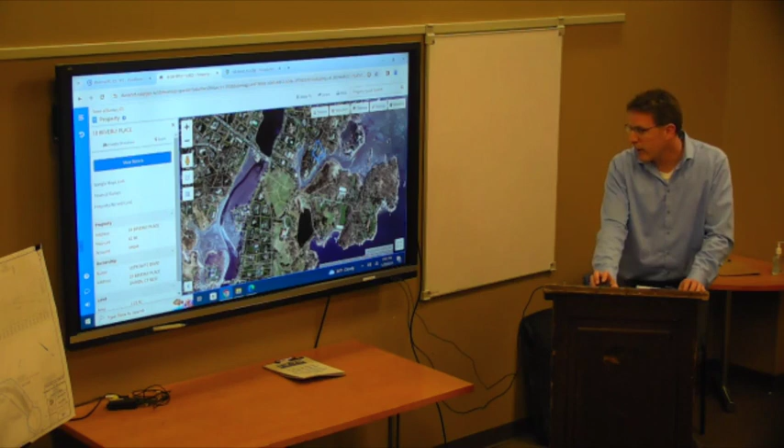Look, in winter, it does get dark early. There's currently people that have the ability to be on the island after dusk. So we still think it's a good idea, and it's a part of the application that was proposed. And I'm guessing that all of the neighboring properties have exterior lights that are on from time to time. And I don't think these are at all going to be out of character with a residential level of light, either just for the enjoyment of area residents or for impacts to coastal resources.

Stop sign, question on the stop sign. Hold on one second on that. Do we care what time they turn on or turn off? I mean, I live right next to the school. I drive home at 10 o'clock at night, the lights in all the parking lots are on. I mean, do we care about the lights, when these things turn on and turn off? Well, it's not BMW, it's not H&L Chevrolet.

Right, I think the issue here as well is there are currently people that live on the island. I think there's a smattering of folks who now live there. The stable is operating there as well. So there are people who live there that come and go. And there are people that need to get there when it's not light out. The future owners. They don't have lights now, though. Right, they don't have lights now.

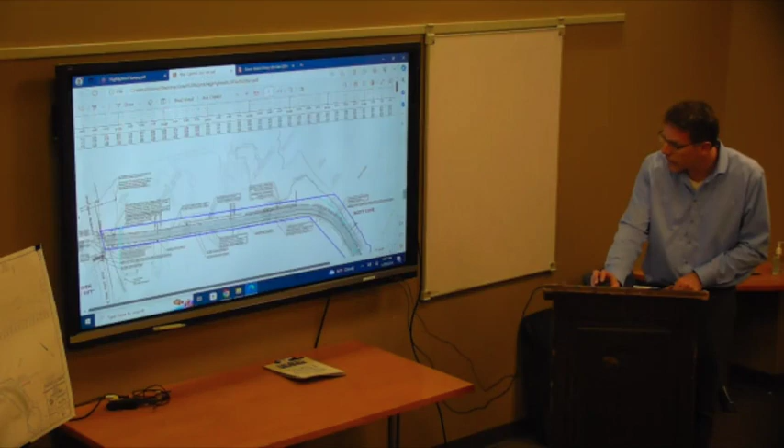The stop sign, I mean, the easy answer is, if I just zoom in on that. Just show where it is again. Yeah, so here's the new stop bar. There is the stop bar on Goodwives River Road. This is the wall, this double line way out here, so you can see there is clear line of sight between a car stopped here and a car stopped here. I think there's no issue.

The neighbor was talking about the one on Great Island, yeah, that one. Oh, this one, yeah. Show where the pillars are. These are the pillars. And this is the stop sign and stop bar. We can look at the location of these with the local traffic authority before they go in, make sure the local traffic authority is satisfied with their location. Great. And then Ed, if you have to, you can move it, right?

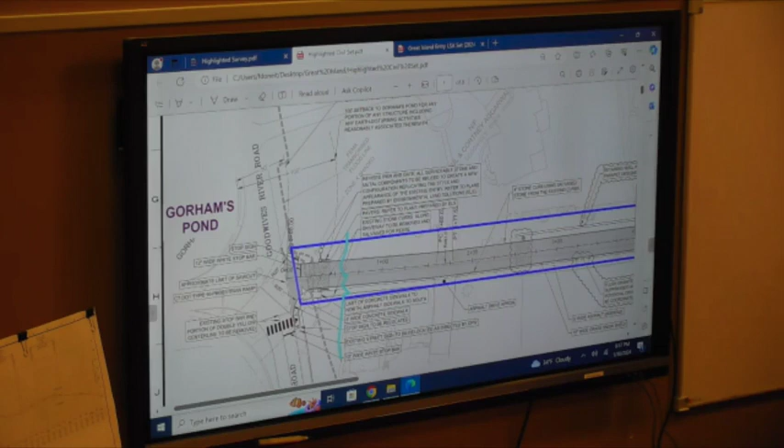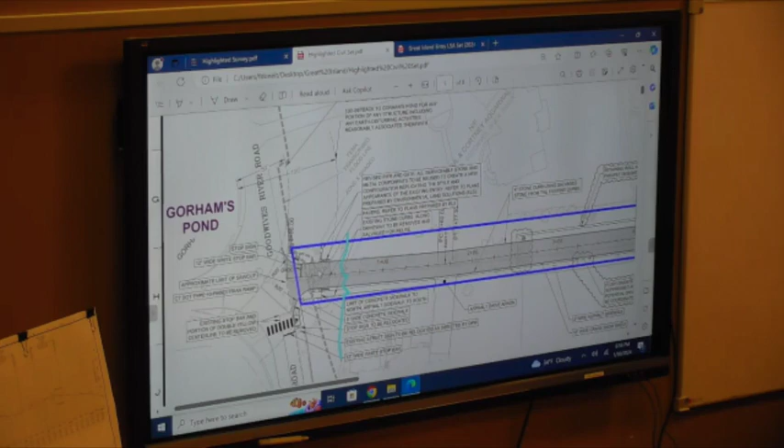Yeah, I did a sightline analysis while I was out there the other day. Can everybody hear Ed? Can you pick him up? Long Neck actually curves away from the wall, so you have sightline all the way down to the intersection of Pear Tree and Long Neck. Okay. Because your department puts in stop signs, stop bars, crosswalks. Correct. You have the truck that says painting and striping? We don't have a truck called painting and striping, just a paint machine and a system to put in signs. And the police department had it, and they moved it across the parking lot.

As we discussed earlier in the application, we cannot provide a gate control here because we have to maintain access to these properties that are not owned by the town. So any gate control in the future would have to be down at the edge of the cul-de-sac if appropriate. But that's not a part of this application at this time.

With regards to that one little sidewalk piece, I didn't know what he was asking. I think they were suggesting that we should install a sidewalk along this edge of the cul-de-sac to get from where the proposed end is to one of the driveways, so that the public wasn't encouraged to walk up this way, but I believe they are going to propose gates here, so I don't think the public's going to be walking up there anyway, and we want to leave open the possibility to put sidewalks anywhere in here, depending on what this wants to look like in the future. But that's not part of this application? Not part of this, we're not proposing to add that sidewalk at this point. Okay.

I think that was all the points that I heard. Okay. Any other questions from the commission? Anything else? You're good? There was the discussion about where everybody parks in the interim. Oh, the construction parking? No, I think one of the neighbors said where are people parking, and that might not be a question for you, Craig, it'll be a question for our town officials to determine what the rules of the road will be.

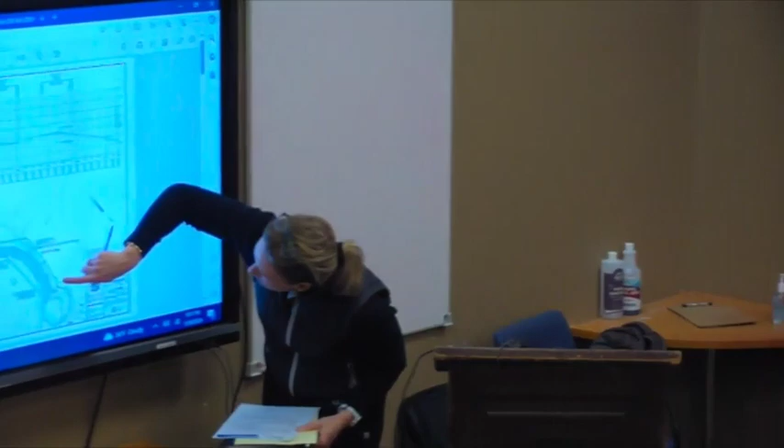And my other question was just about the soil survey that was done with this. Is it possible to see that map that had your nice blue line with the thingamabob? So, just remind me, so this. The cyan line is the flood zone. Cyan, the lighter or the darker? The lighter blue is the flood zone. Okay. And then the dark blue in that area that's not like a straight bound is the edge of Scott Cove, the mean high water line.

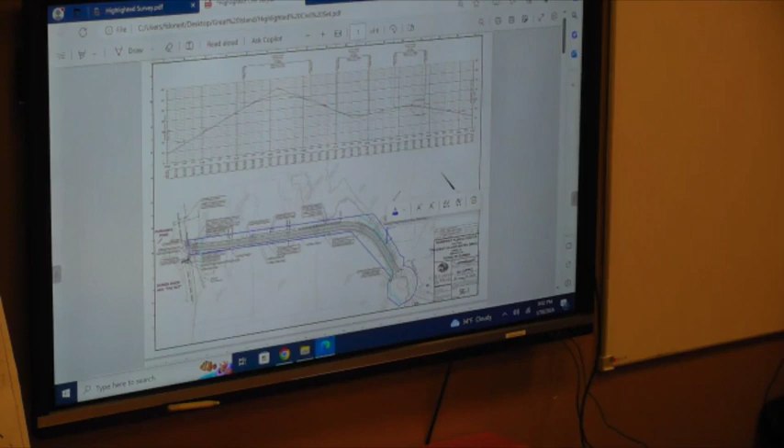So this being a flood zone could have wetland soils in this area? Well, I'll answer that. Is that your question? Well, yes, because the soil maps that were submitted with the EPC planning don't show what soils were found in that area. Okay. But I still want to look at this. Hold that close. Jeremy, give me another one, she can keep it. Okay, so we submitted this letter for the record today from Jay Fain. Jay Fain was the soil scientist that did the original mapping on the town properties.

He notes in his letter, I'll paraphrase, that the flags depicted on the survey accurately reflect the position of the flags that he placed in the field. He did not prepare a sketch to go with the soils report because he was working hand in hand concurrently with our surveyors that were on site at the same time. So there was no need to create the sketch map to communicate. They were doing it real time in the field. But in so much as it was necessary, he has confirmed that our survey accurately depicts the position of flags that he placed.

He also commented on this edge here in a second paragraph, talking about the edge of the boundary of parcel 23A where it abuts Scott Cove. Scott Cove is an intertidal mudflat which represents a tidal resource. There is not a tidal wetland fringe in this location. So the only area of boundary is that the mean high water line is elevation 3.7. That's an average of high tides. You might have an annual high tide as high as in the upper fives, right?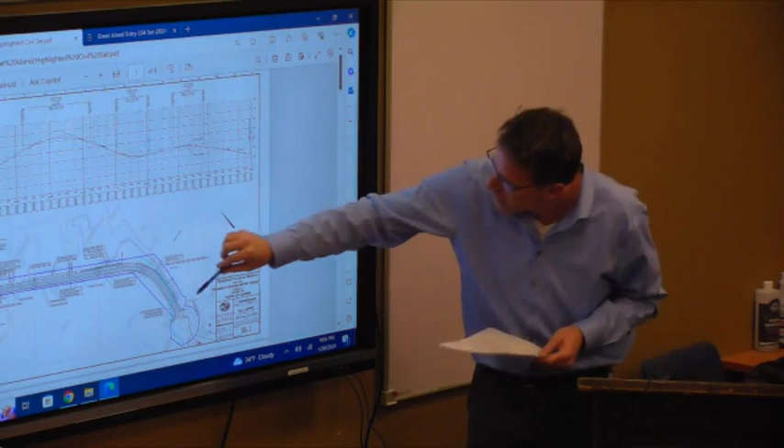So am I thinking too deep into, could the water go up and over the wall if we had it flooded or something like that? No, well, no, so it's largely gonna be waterward of the wall, except down at this end. So if you had a coastal flood to elevation 14, the cul-de-sac would be inundated. Okay. Okay, thank you. I think we got everybody there, right? We got everybody there.

You're the applicant, right? Yes. Okay, you're all set? Sure. Applicant gets the last shot, okay? Any questions you can answer? Do you want to see if this neighbor has a question on the report? No. I got it. You good?

Good. Two things. One, where are the construction vehicles gonna park? Assuming cul-de-sac, somewhere north, obviously they're not parking. Well, there might be locations on the island where they can park temporarily. Then hours of operation, you're fine weekdays, normal hours, no Sunday? Yeah, just whatever the usual sound ordinance regulations are.

Perfect. You did Middlesex Road on a Sunday this summer, didn't you, in August? Sounds like you're getting a complaint. No, it was like August 10th, there was nobody around, it was a ghost town.

I think it was a Saturday. Was it a Saturday? Yeah. All right, but you're allowed to do roads on Sunday. We are allowed to do certain things, and the number one decision-making, the thing I have to consider is impacts to the residents. That's the first. So as of right now, we don't plan on doing any work on weekends. And if we were to do any work, it would be work that you wouldn't know we were doing. Right. Trying to be respectful of the neighborhood.

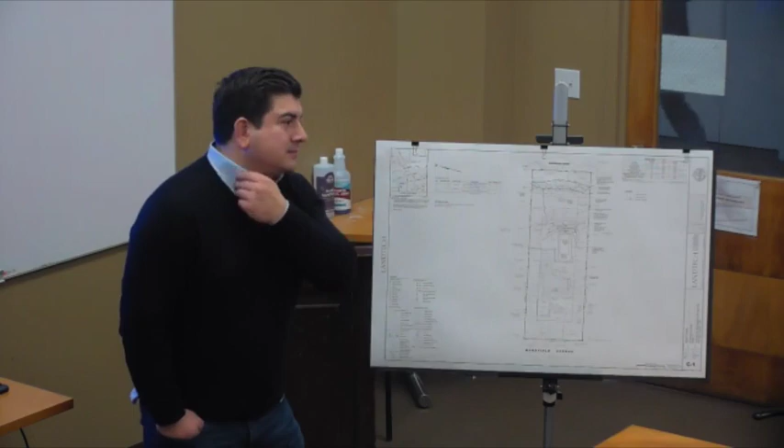So you're allowed to do 6 inches of fill, right? Yeah, as you get away from, in this case, the house or the pool, you're allowed to change the grade no more than 20 cubic yards, no more than 6 inches. Again, we regulate within 15 feet of property lines or more than 25 feet away from the house. So in this case, as Andy said, the permit was specific to the pool.

And oftentimes people say, I'm just building a pool with a very small terrace or patio around it. In this case, they've kind of created a flat area behind the pool. Right, so you can build a croquet court back there. No, not really. Not that much.

So I'm just looking at the topo, you're going from, yeah, so you see in dark 29 here to 30. Yeah, and here in dark, you can see the 134 hugged the edge of the pool. And in the maroon color, pink color, whatever, you can see where the 134 landed, and then sloped down. So the 134 got pushed out about 10 feet, 15 feet. It goes and then it slopes to 132, 131.

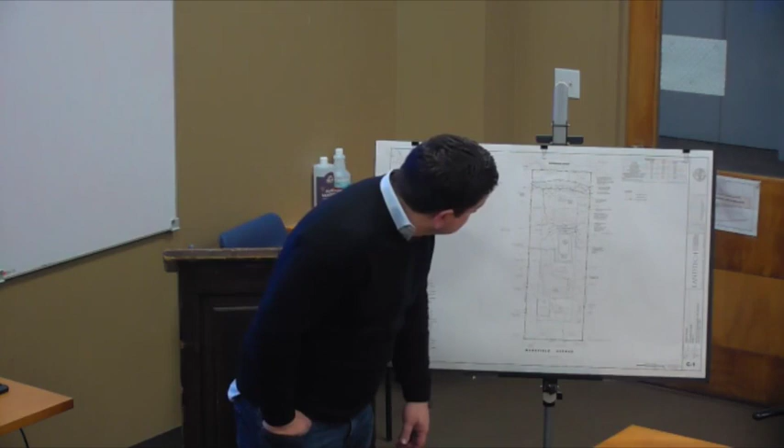No, it's 132 to 131. Yeah, you see all the pink is what's actually existing out there, and what was previously approved is in dark. Okay. Those were previously approved. Right, no, I get that. It just got pushed out. The elevation's the same, it just got pushed out this way and then sloped down. Before it was just sloping down from the edge of the pool down.

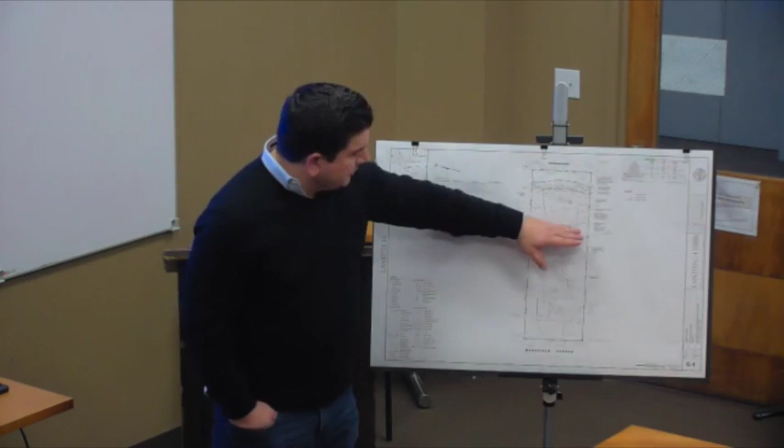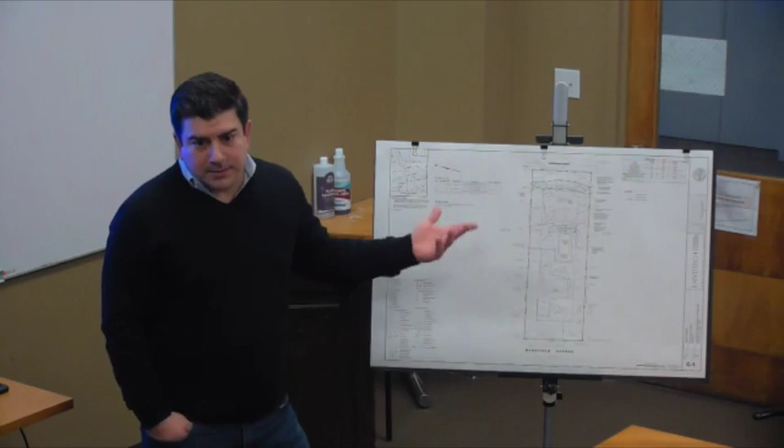How many yards of material? Less than 100 cubic yards. And nothing was brought on. Obviously, additional spoils from the pool ended up there. The rest got hauled out, because there was more spoils from the pool, obviously, than just that. So the dirt from the pool hole, you just spread it out? Yeah, it just got spread out a little more. That's all. So you save some money. Well,

Any questions for the commission on this one? You said you've already been in front of EPC? Yeah, we have their approval. And I don't know if Joe Canis looked at this one, right? Probably not, because we didn't propose any new drainage for this. Drainage was previously approved for the pool? That's correct. The drainage was approved for the pool as part of the building permit. Joe Canis did not review this application. It was already installed, so drainage is in and working.

Okay. Jamie, you're good? George, you okay? Yes. Mike? Yep. Okay, anybody in the public want to speak to this application? Nope. Motion to close? Amy makes a motion, Jamie makes a second, all in favor?

Get back to you. Well, we get to do this tonight? We do this tonight? I'm looking for one. You got another pool. And I got my pool contractor in the audience.

Next item on the agenda, land filling and regrading application number 559, PL 23-186, Thomas and Katherine Meyerer, 12 McLaren Road, proposed to construct a new pool and patio area on the eastern portion of the property and perform related site development activities, including regrading of the property and installation of stormwater management. The 0.4 plus or minus acre subject property is located on the east side of McLaren Road, approximately 140 feet south of its intersection with McLaren Road South, and it's shown as Assessor's map number 17, lot 34 in the R1 half zone.

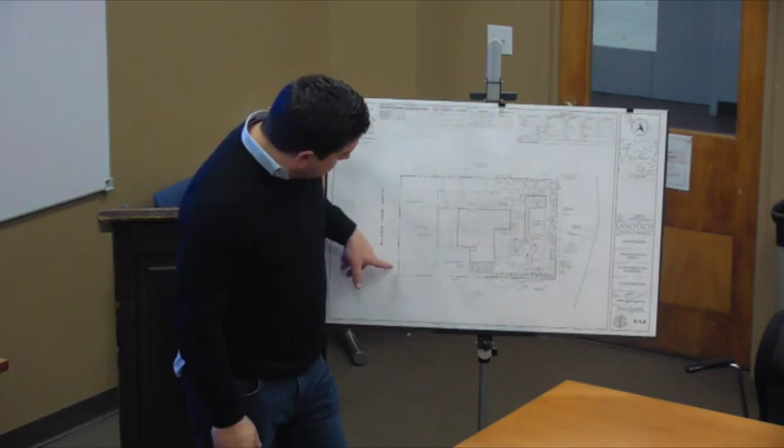For construction, they would just continue down the existing driveway with a construction apron to get into the backyard, silt fence, stockpile areas, and such. As part of EPC's comments, we had to add some shrubbery along the eastern boundary there. That shrubbery was to, again, provide additional filtration.

On the north side here, you'll see it's pretty well vegetated, and you'll see in some photos in a little bit, evergreens. We're proposing to add some evergreens also along this south side. And as part of one of your regulations, maybe under your purview or not, when you build a pool within the rear setback, so here's your rear setback, if your pool goes beyond that limit, you need to provide some screening.

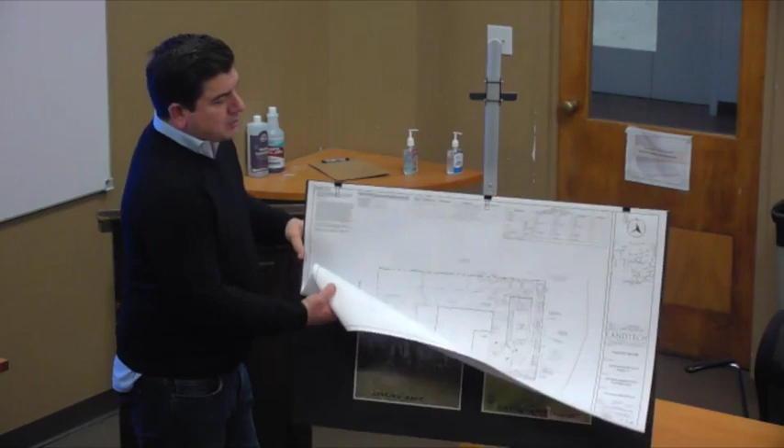And we've asked staff, and we got some feedback from staff that we should provide that screening. And we did get a fence approved through EPC. I just want to make a statement here as well. So here, looking north, this is where the pool would go, these are those existing evergreens looking up. This is looking south, where we plan to put some additional evergreens for the screening.

This is looking to the east, so this is the backyard. There's a retaining wall here along the eastern boundary that's anywhere between 3 to 5 feet tall. And you can see the residences in the distance here. One thing we appealed to staff was there's existing wetlands in between that house on Mansfield and our property. That's why we had to go before EPC. Part of that 50-foot wetland setback is on our property. And there's a stream that kind of bisects the rear of their property.

So our argument was, we really didn't want to cage ourselves in with screening along the rear of the property. There is already a nice backdrop. You can see it here in the summer months, and I haven't showed this to staff, so maybe I can convince them and change their mind. You guys can help me convince them as well. You can't even see the house in the summer when you're using the pool.

So here are these stairs that go down. The pool sits right in this envelope here, and you can't really see the house. And when you're using the pool, it's in the summer months, right? So I get it, in the winter months it's a little bit bare, but nobody's out there really swimming then. I think the impetus behind a pool is for the summer months to provide the necessary screening.

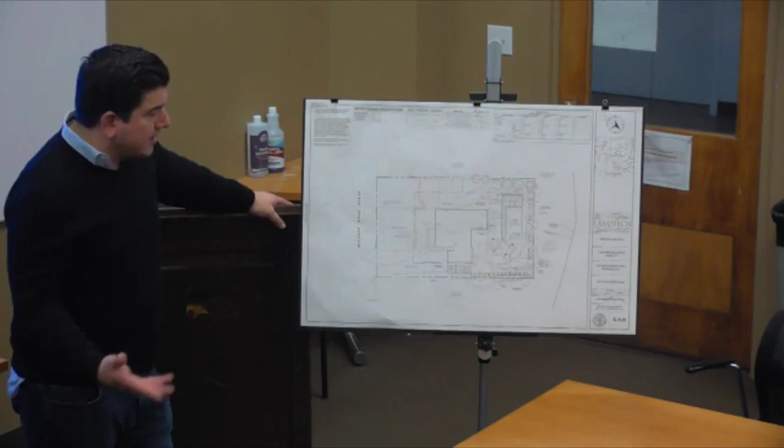Where's the pool fence? Doesn't a pool fence have to be 4 feet around the entire pool? We're doing an auto cover. So with the auto cover, with the new building code, it surpasses needing a pool fence. Oh, really? Yeah. Okay. I've been told that might get overturned. Correct, but it's still part of the I-Code. Understood. So if it does, you have the ability to then meet code with the auto cover.

Or fencing. Correct. If we need to do fencing, yes. And where would you put the fencing? On the property line? If we had to do fencing, you'd put fencing around here and connect all the way around with gates and the necessary.

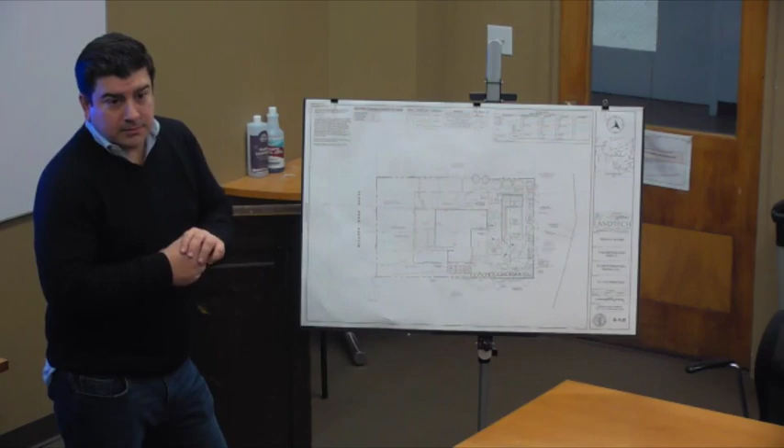Abutters have been notified, so presumably the people behind have been notified in the list. Correct. Okay, all right. You're welcome to notify. The screening usually cuts both ways, because you want it too, right? You don't want to see them, and they don't want to see you. Right. But I think because we have that big natural resource buffer with the stream and the wetlands, you can't develop back there anyways. You're never going to be building anything back there. Right. So I think with that added buffer, that was our case on not needing

to do it. I've always thought a pool fence also provided security for kids wandering around and animals. You know, a lot of deer around who might just come in and jump on top of your pool cover, heaven forbid. I wasn't aware that the pool code changed. Just from a real estate perspective, when I was doing due diligence on a house, it does have an automatic pool cover, but one of the real estate attorneys told me that there's a push to get that repealed. I had no idea where it is, so it was just more of an FYI that at the state level, there's some grumblings to try to repeal that. Correct. It's a safety thing too.

All right, so if we don't require the screening, is that a non-condition of approval? Well, Andy's referring to section 364 of the regulations, and it's really in the final zoning and building permit, if it gets approved by the commission, that's something we would look at as, here's the plan that was approved, does that meet section 364? Okay. Can you just go back to the picture where it shows the natural buffer, the natural screening? Yeah. And that's helpful, submitting those to the record. Definitely, yep.

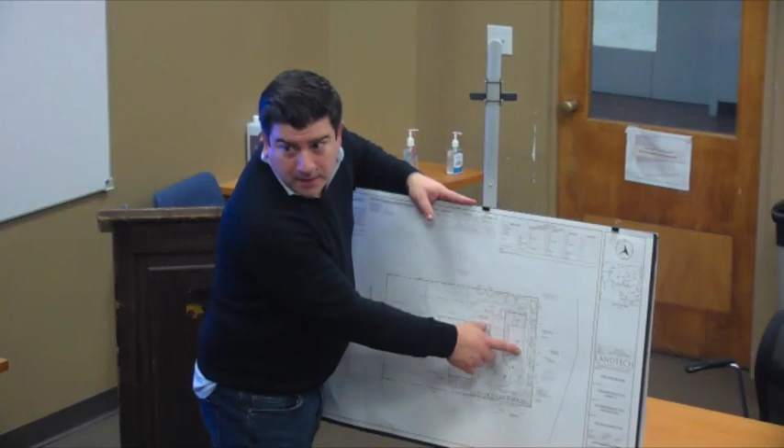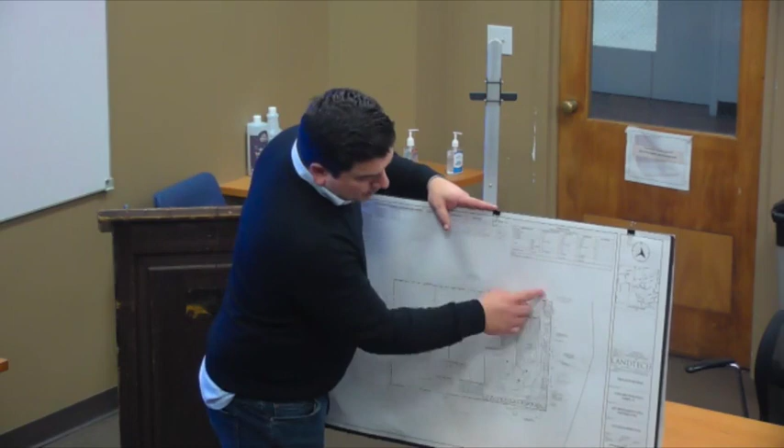The version I'm looking at doesn't have any plantings along the back. Is that the proposed? There's one at the bottom, all the way at the bottom. So, the existing plantings are off the property. So what are those? These things here are the shrubs that EPC wanted, so these are gonna be shrubs that are probably gonna be 3 to 4 feet tall as well. So are you asking us to overturn EPC? No, we have to put those in based on EPC's approval. Gotcha. But what would have to also be added is either a fence or a row of evergreens. So along that eastern property line, there's a number of trees, and if you've been to the site, the trees are not the greatest

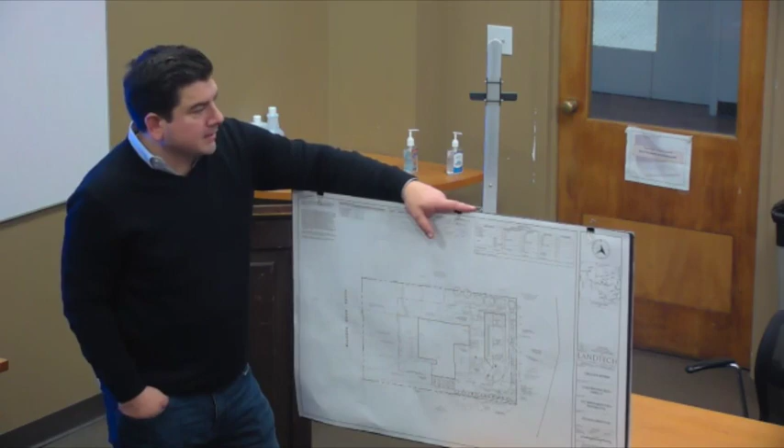trees in the world. What type of tree are they that are dropping all those things? Those trees are not gonna work in this. They have to go, and along the southern property line, those trees are not in great shape, they're not appropriate trees. They're going. So you're replanting along the south property line. Correct. The trees along the east property line will be replaced with shrubs, and the trees along the north property line will remain as is. Exactly. And then, as Andy noted, there are some trees at the bottom of the wall on the neighbor's property that are growing way above the wall. Right. And I think that's what's shown in your photos. Exactly. Now, what's the date of your plan that you're staring at? For C1? There's two revisions on that. 129?

Okay. 129, 24, right, I don't have that in this plan. Andy, did you upload that most revised plan to the application? I did, just yesterday. Came in yesterday, okay. Hot off the press. Yeah. It's very similar, I think. The only change would be the fence, EPC stuff. This is from the very last one. Oh, I see, yeah. All right, it's on there. Should be in version 2. Got it, that's right. Perfect. All right.

So can we get a motion to close? I'll make a motion. Mike makes the motion, looking for a second. Amy got the second, all in favor?

Done. Thank you all. Thank you. All right, thank you. See you in a couple of weeks. Yep. Thanks, Andy. Just leave the board behind. Just leave it.

All right, next up on the agenda, mandatory referral number 1-2024, Board of Selectmen, Great Island. In our packets, we got a memo to Jeremy Ginsberg from Kathleen Buch, the Town Administrator, asking for a mandatory referral. Department of Public Works has been working on a plan to widen the access driveway to Great Island on lot number 23A, as shown on Assessor's map number 58 as lot number 1AA, from Goodwives River Road to the recently purchased Great Island turnaround. This provides safe access to and from Great Island for emergency vehicles as well as the